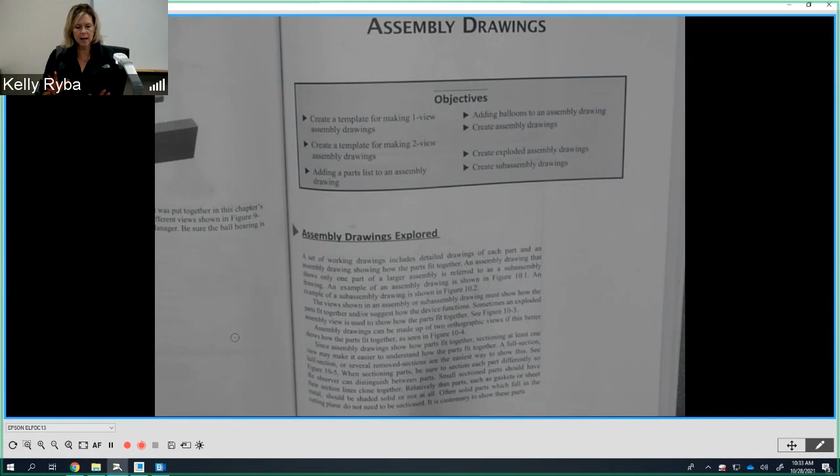So what I'm going to do is go underneath my document camera here. Chapter 10 starts on page 339. This is Chapter 10, Assembly Drawings. Now, the big thing that assembly drawings do in this chapter is set up the borders so that you can get a bill of material set and then get the parts ballooned. It also sets up a couple different types of assembly views so that when you pull your drawings in, they're all set already.

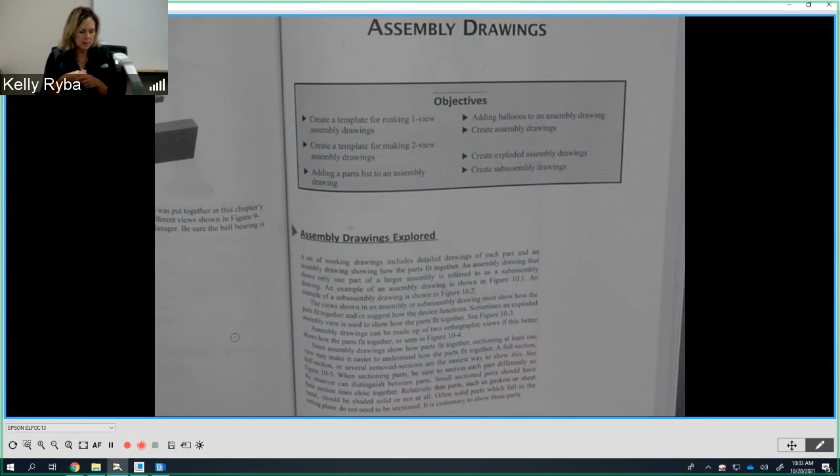So I want to go over what the process is here. First of all, what they're going to try to accomplish, what the process is. I'm going to do one of the tutorials here today and then let you go from there.

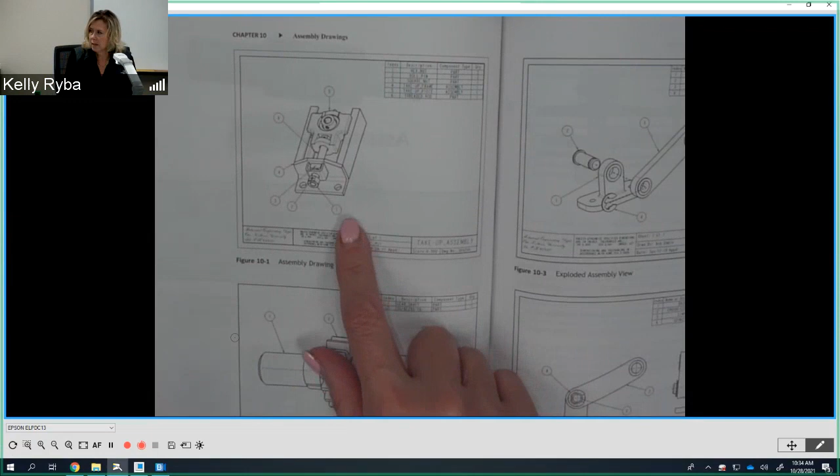As we turn the page here, you're going to notice there's a couple different views of different assemblies. The first one here, this is an assembly drawing—a 3D view of an assembly that is together, okay? A 3D view of an assembly that is together.

Then we have a subassembly, okay—part of a larger assembly, but kind of putting a couple of pieces together to start off with, which probably seems to make sense, or maybe pre-assembled, if you would, before it gets to its final. This is a subassembly drawing, so again, this is a 3D view with it together.

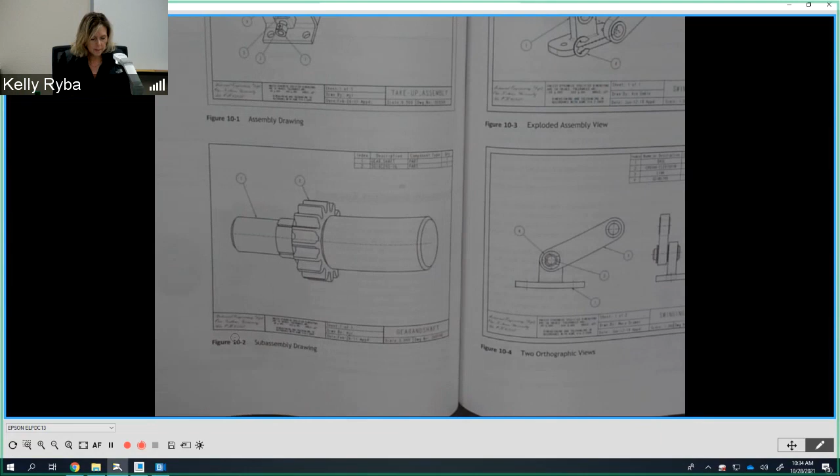Then we can also do exploded views. Now, exploded views, like I told you last time we were together when we talked about assemblies, are nice and all when we have parts manuals, okay? When we're sending things out to the shop floor or for engineering purposes...

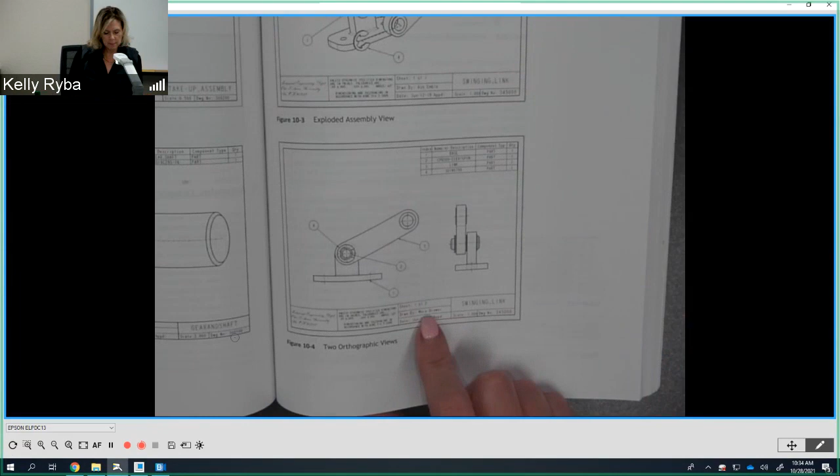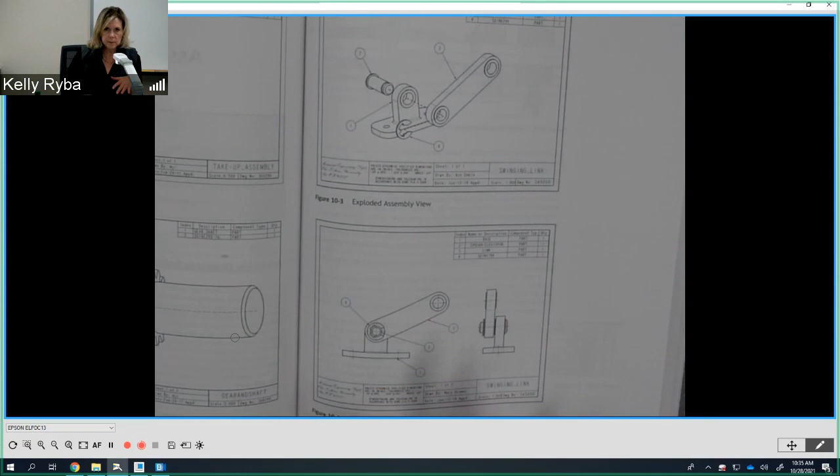We're either going to do the orthographically projected assembly that we see here, okay—that's the preferred one—or it's sometimes nice to show the parts together in the together form. The exploded views are really saved for things like parts manuals, where maybe a layperson or a customer might say, oh, I need to order that part, okay, or something like that. But for engineering purposes and shop floor purposes, we would do one of these two: the together 3D view or like a 2 or 3 view assembly drawing, okay?

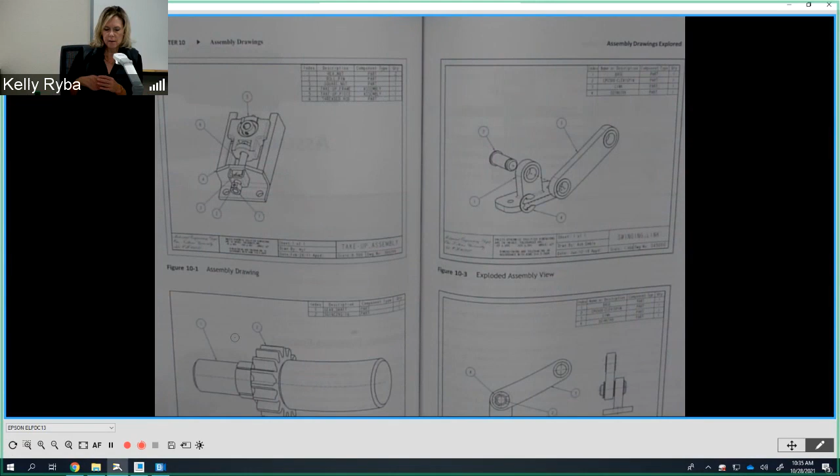Notice that all of them, no matter which one we're at, have a couple things in common. There's a bill of material. Now, based on the experience you guys have—if you're here in Creo, you've had a couple levels of CAD already. You did AutoCAD, you did SolidWorks, and now we're doing Creo.

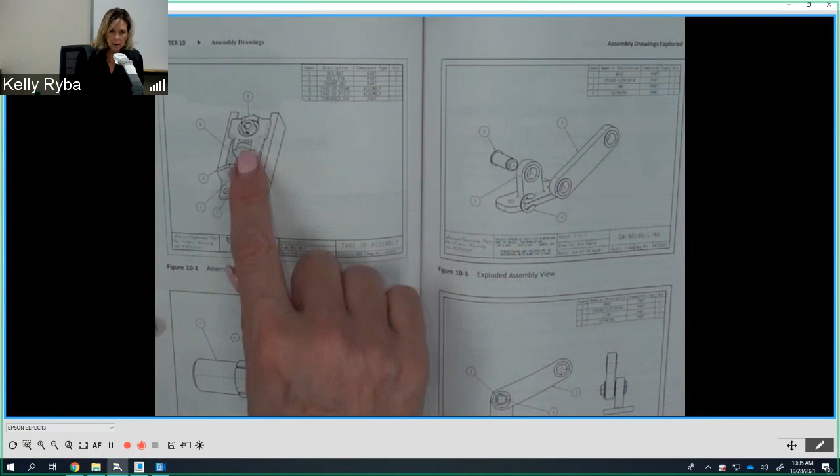So bills of material are something you're familiar with. Basically what they do is let us know balloon-wise which part is which, and give a description. In this case, they have a column for component type. Typically we would put part number in there, and this is going to be the quantity.

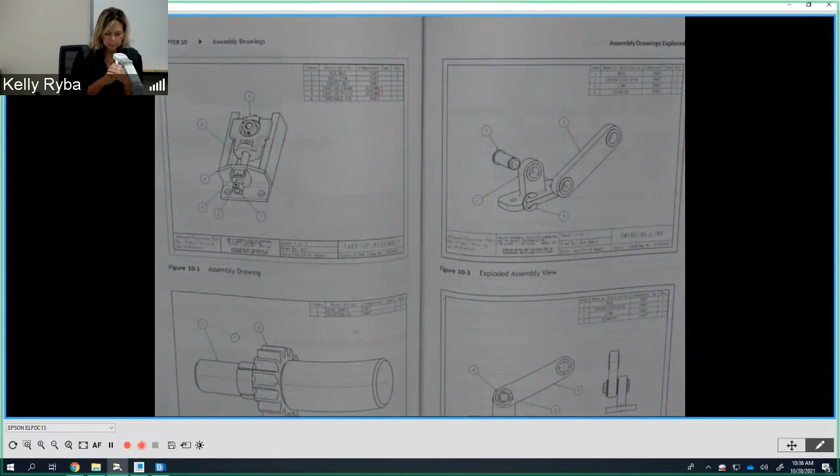Same thing you'll notice for the subassembly, just fewer parts, and then for the 2-view. The exploded view does the very same thing, but this isn't the type you would actually send to the shop floor. We can do 3D. 3D is nice, but let's keep them together, or the 2D, the 2-view.

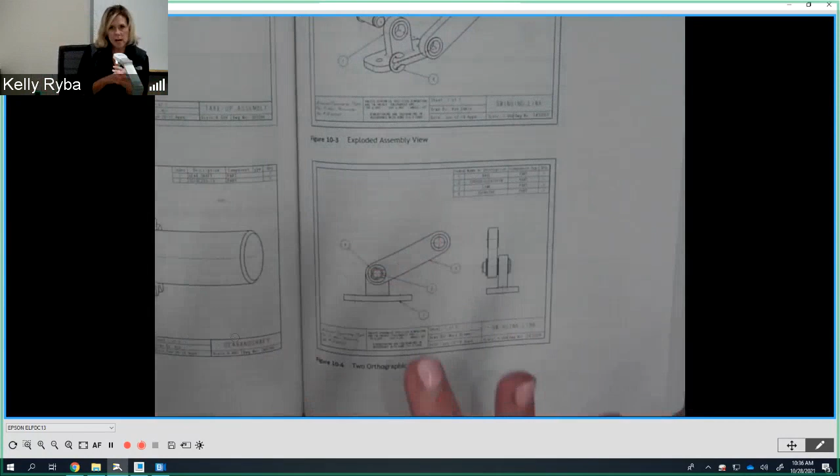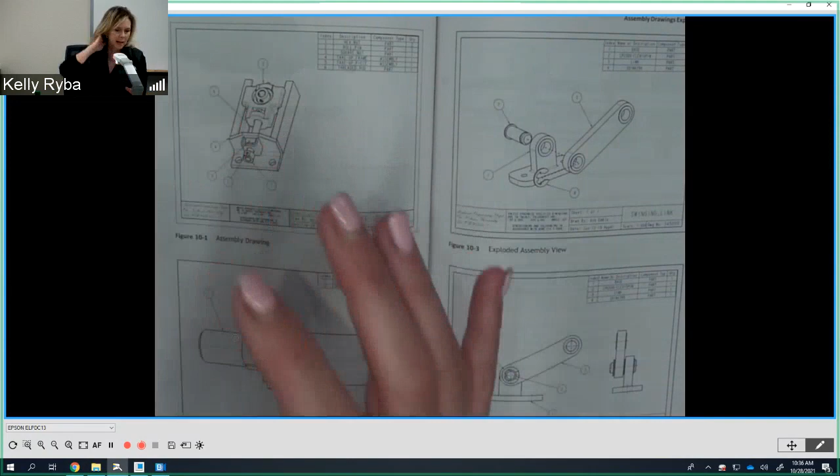So in this chapter, the main activity they're doing in the tutorials will set you up for the homework. You're going to be creating the drawing borders that set up your bill of materials so it automatically comes up, picks the appropriate views, and puts the balloons on. We're going to be creating an assembly template with the drawing border and all that stuff in place so it's all set for us. Those are the two things we're going to be doing.

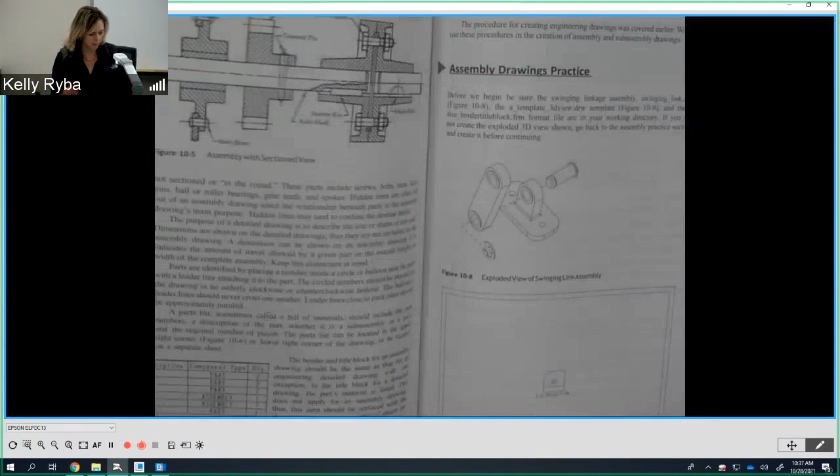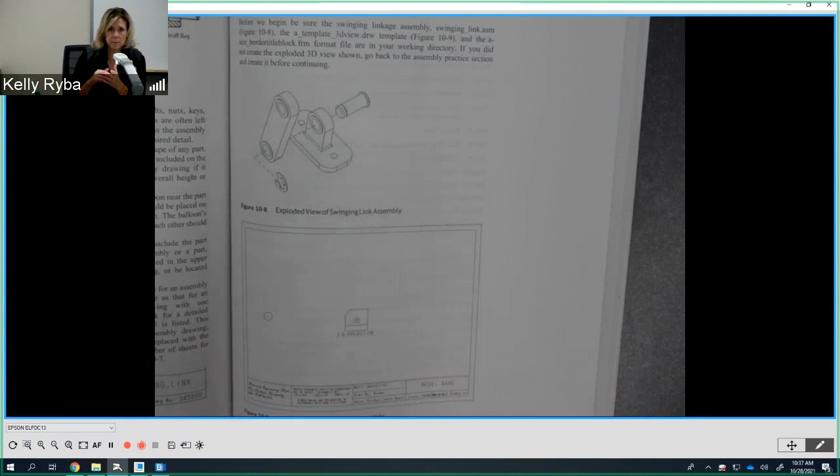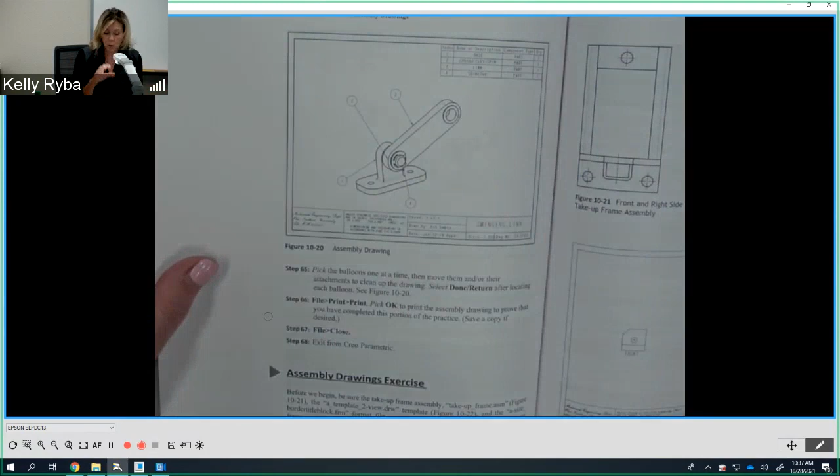So as we look here, I'm going to point here first, and then we'll go back and do it. The very first tutorial, which starts on page 343, is an assignment you have to go through because you have to create this type of drawing border. We're going to create a drawing border. I'm going to go to the end here, where you have the 3D view of the part when it's together, ballooned, and a bill of material up here. That's the process they walk through on pages 343 to 352.

So that's the first type of border you're going to create. Then the next type of border you're going to create starts on page 352 and goes to 364, and we're going to create a 2-view assembly together with the bill of material here. So those are the big two things.

Now, once we have those created, your problems are just pulling up some other assemblies and using those borders to create the drawings, and cleaning them up so they're nice assembly drawings. So the tutorials are essential here — they're actually worth more than the drawings I'm having you assign.

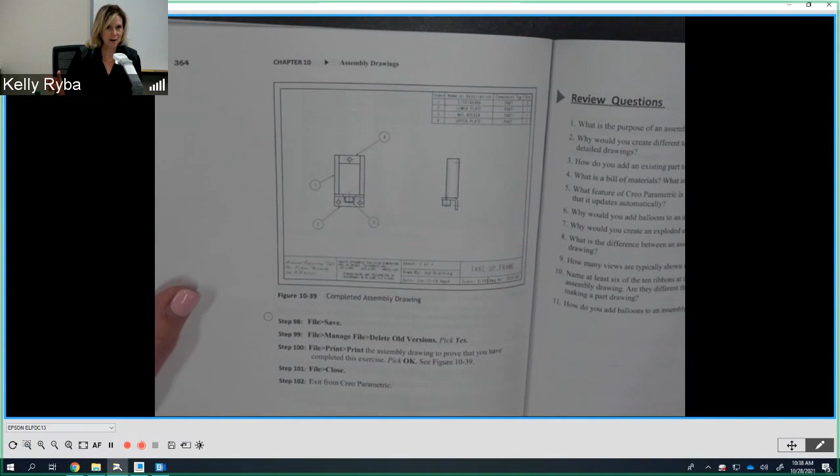Let's look at our homework quick. The tutorials are going to be required that you do. If we go into Learning Plan, Chapter 10, down to Chapter 10 homework. The Chapter 10 tutorials, there's two of them. They're actually worth 10 points each because you do have to go through some work here, creating those template borders for the 3D view and the 2-view assembly drawings.

And then you're going to use those in the problems down here. So it looks like there's a lot of homework problems, but you already have these assemblies created. All you're going to do is put them on the appropriate border using the tutorial borders you created, and these down here end up being just 5 points each.

There's still 40 points total because there's 8 to do, but you're going to do the adjustable shaft support with either the 3D assembly and the 2-view assembly. Then the same thing for the step shaft subassembly, the take-up piece, and the take-up assembly. So you're doing 2 assembly drawings for 3 different assemblies you've already created. We're going to continue to build on what we've done.

So what I'm going to do first here is today's tutorial, creating the 3D view of the, what is it called, the swinging link. So please open up to page 343, and that's where this tutorial starts. Now again, this is a required tutorial for you to do that's going to be graded.

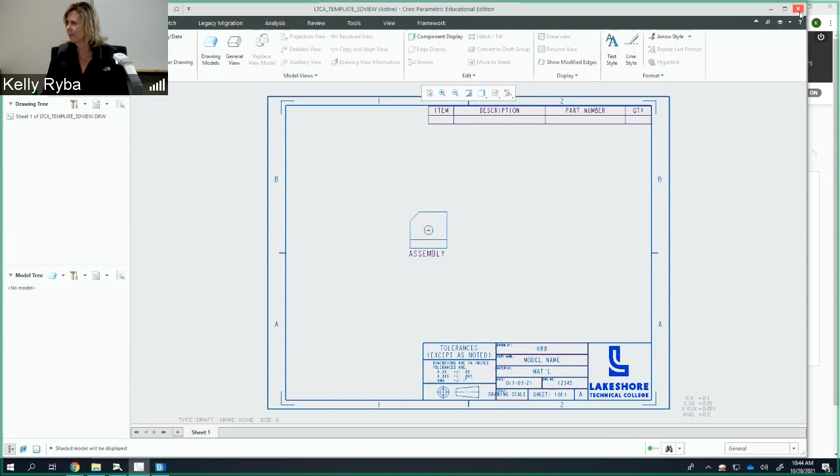Now what I'm going to do here - oops, what? I think I saved over the top of mine. Okay, let me do this, hold on. I think I got to download mine. I might have actually saved over the top of what I wasn't supposed to. So let me get rid of this.

I'm going to close this, and I'm going to go to session - I'm going to erase all this, deleted. Shoots. Okay, let me download this guy.

And I'm going to change it over. I'm going to put it into my downloads, to my drive, and my working directory. Oops. There should be the good one - my downloads.

I want to replace it. I was working with these last night, I was tired, I might have accidentally deleted over the top of something I wasn't supposed to. So let me go back in here and open up the replaced one now - LTCA 3D view. Shoot, I must have uploaded the wrong one.

All right, now - actually, it's totally fine. It's totally fine. We're just going to use this and we'll go through the process anyway. It should be totally good.

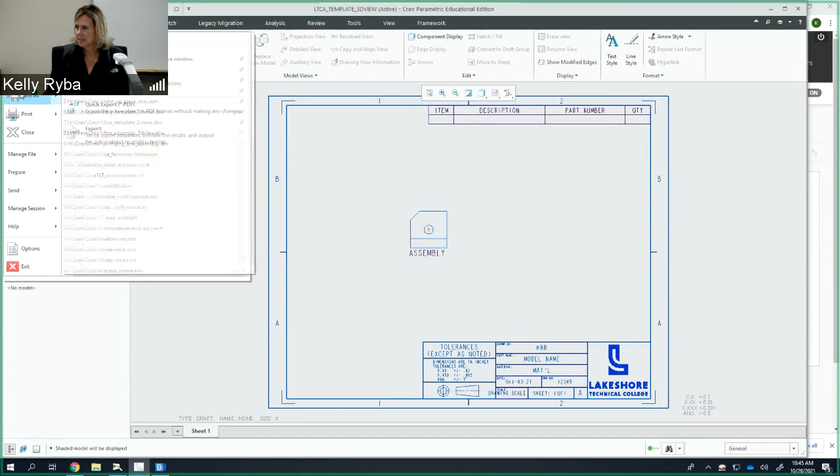So what I'm going to do here is exactly what they say. We're going to do file, save as, and save a copy. What you want to do is LTC A underscore template underscore assembly - oopsie - underscore, I'm going to do ASSY underscore 3D view, so you know this is going to be the 3D view assembly. I'm going to hit OK on that.

And then we're literally going to do this step by step. I'm going to do file and close this out, and I need to do the same thing again - file, manage session, erase what's not displayed, and hit OK. Now I'm going to reopen the file I just saved. I'm going to do open, go back over, and it's the one, the ASSY assembly template assembly, ASSY, and there we go.

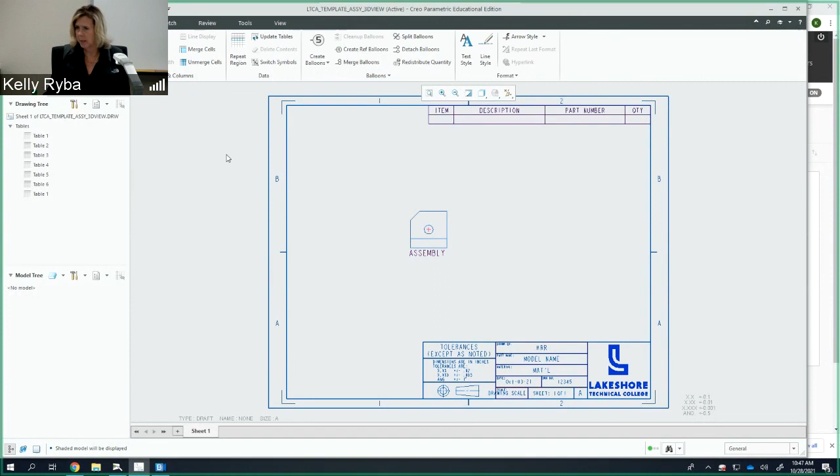Now what I'm going to do is go up to tools and create a template, selecting the table tool. It's telling me to double click on the material box in the title block, but I did not change anything there. I kept everything the same as my LTC title block, so I skipped over that. You don't need to do that either.

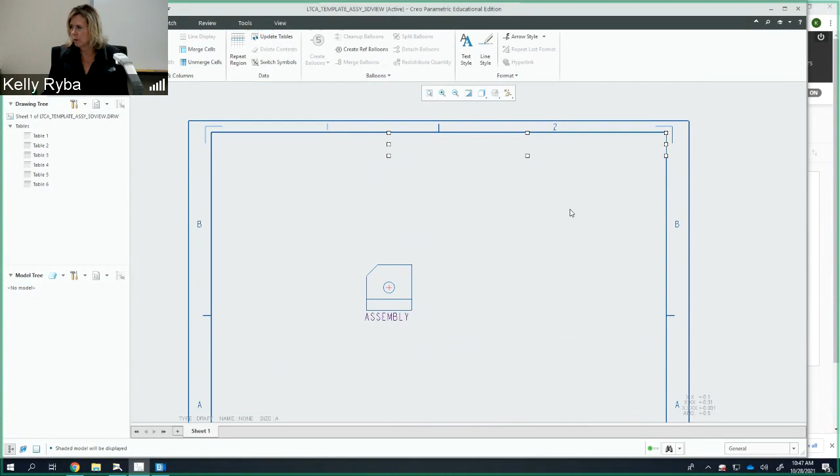Before we get into the other part, we are going to select and delete that bill of material up there. We're just going to re-put it in so that you have it. And then we are also going to delete this view as well, so that we have a fresh piece of paper.

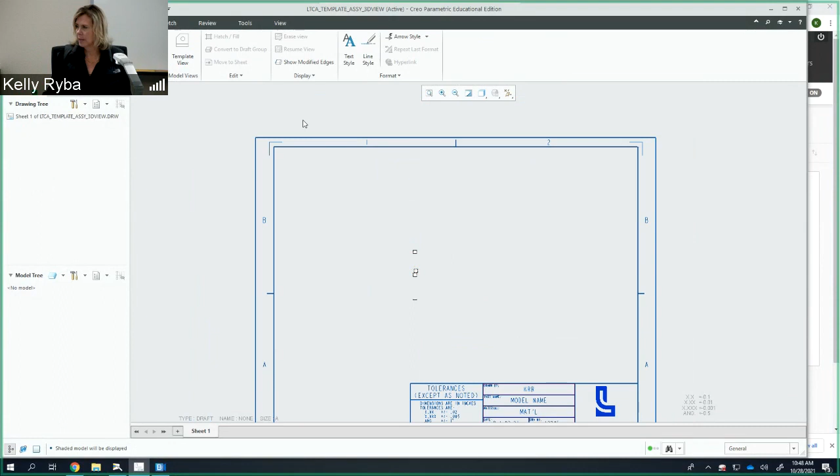Now we're going to go up and select the layout view here, and select template view. This is where we need to call our new name assembly. Then over here for view status, we are going to have orientation not to the front, we need it to be the 3D view. Make sure you put it in just like this and remember exactly how you call it, because we're going to have to make sure there is a view like that in our assembly drawing.

Now you can put the exploded view in here too, if you wanted to put the exploded view in as default, capital D, that way you do have an option for an exploded view if you wanted. It's not bad to have it, you can just check and uncheck it. We'll see where you can do that. Then we're going to go down to model display, and we want no hidden lines. Then down to tangent edge display, and we want dimmed.

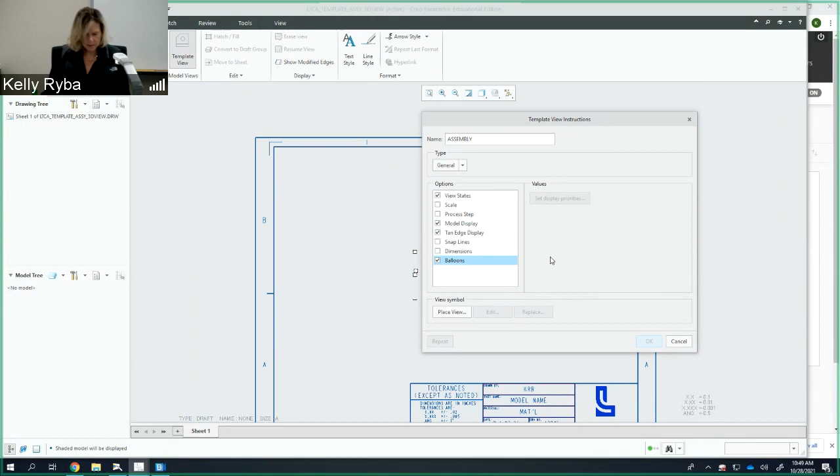Now we also want to check balloons, make sure it's checked. And then we're going to place our view. Why isn't it letting me place my view? Okay, I think I just have to click. There it goes.

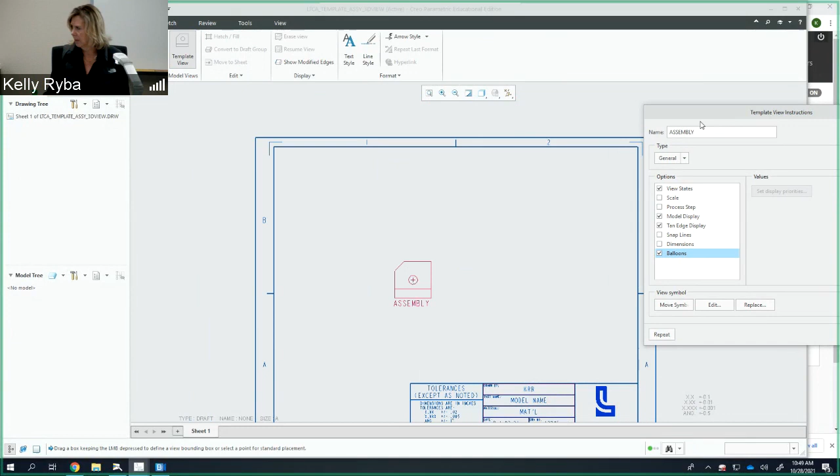Once that's done, when you place your view here, because we're going to have a bill of material up here, it's good to go a little bit to the left, kind of in the middle-ish, but a little bit to the left. And then we're going to hit OK. All right, so we're all set there.

Now it's a good idea to just hit save here, automatically save, and then we're going to turn the page. We're going to start making our bill of material. I'm going to zoom into the upper right-hand corner here, and we're going to go over to table, and we're going to create a table. So we're going to click on this.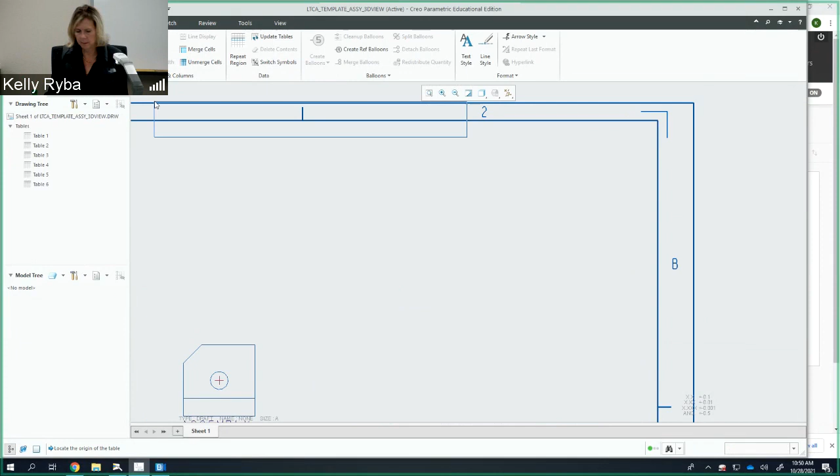Now we're going to have 1, 2, 3, 4 across and 2 down, so we're going to click on that. Then we're going to go in here and place it. Now we want it to be right in the upper right-hand corner, like in that corner, so that there's not a gap. So place it so it's right on that upper line and the right line, and then zoom in to make sure it's where it's supposed to be. See, mine's not all the way there.

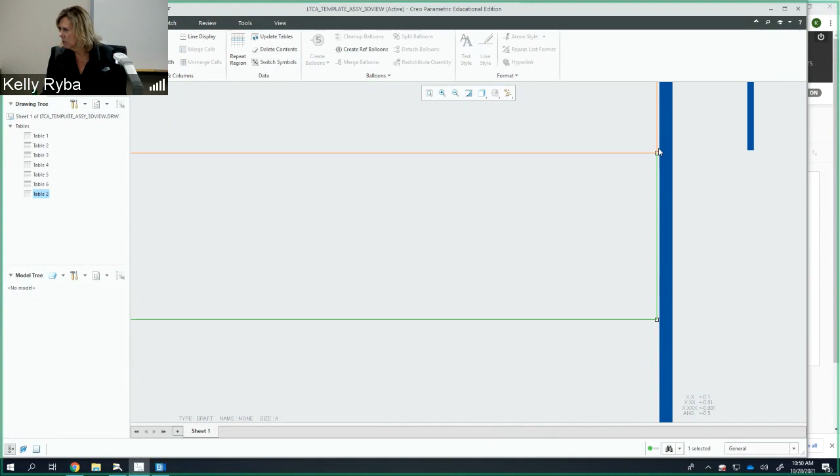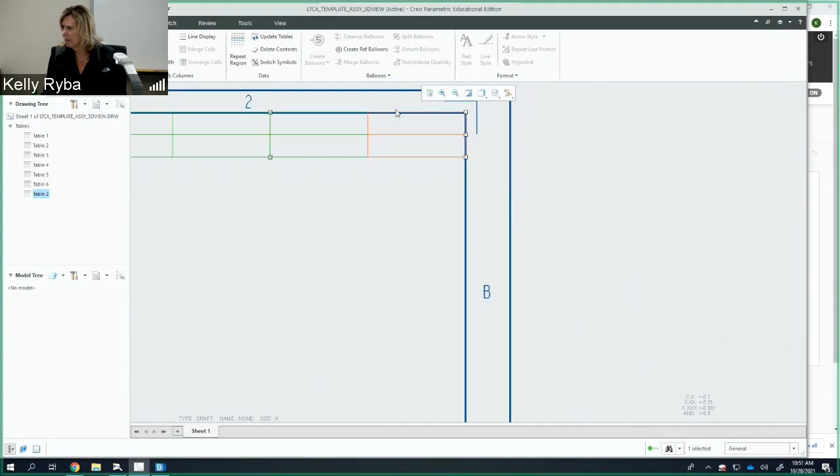So I'm going to grab it again as a whole by selecting it and then moving it over, when it's there, onto the actual border. Do you see how I did that? And I'm going to check this part up here. This part looks good. Okay, so just make sure that it's scooched up there so that there's not a gap.

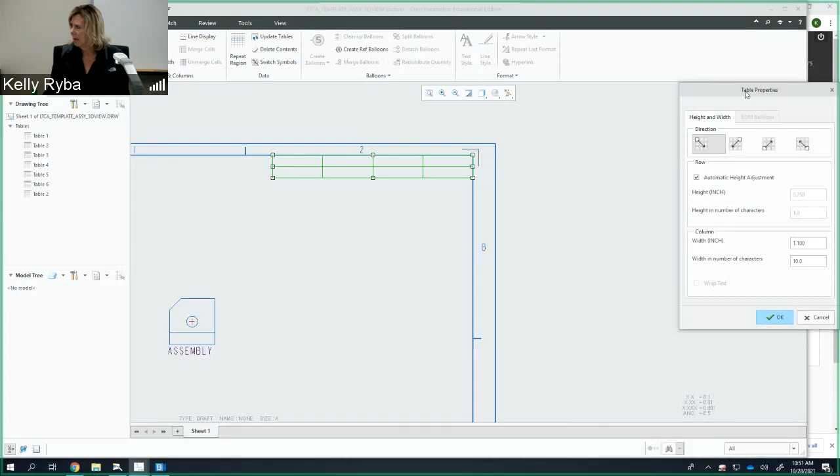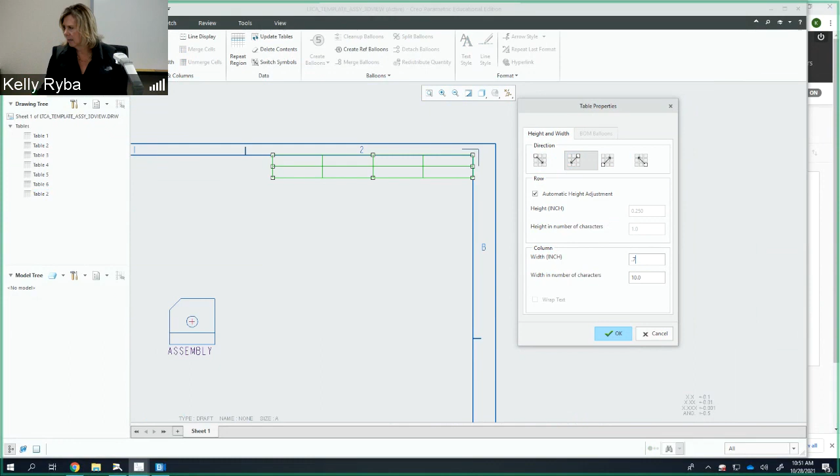All right, so now what I'm going to do is pick this table over here, and I believe it's table 2. When I click on it, notice that it highlights it. So table number 2 I pick, and I'm going to go to properties, which is like that edit definition symbol. Now I come up with this. I want to do my direction in the second box over here, leftward and descending. And then before I leave here, I want to set my column width - now they have 0.5, I'm going to put 0.7. I found that I just like it a little bit wider than the 0.5 that they have, so I'm going to put 0.7.

This is going to set up the column width for a couple of those. Now my first column is set, so I'm going to go to the second column and click on that.

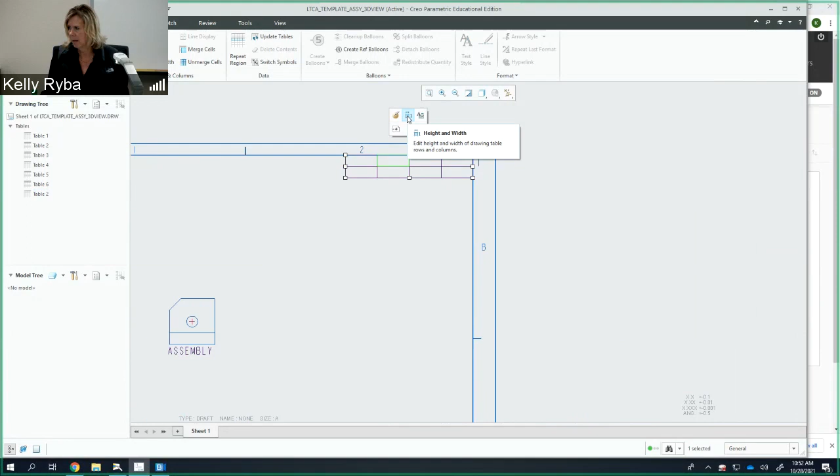Just to the right of that, in properties or edit definition, there's a height and width for this second column. I'm going to go down to the column width.

They suggest 2 inches, but I'm going to put 2.5 for a little wider column. Then I'll do the same thing on the third column: click there and change the width. Here they suggest 1.4, but I'm going to say 2 inches.

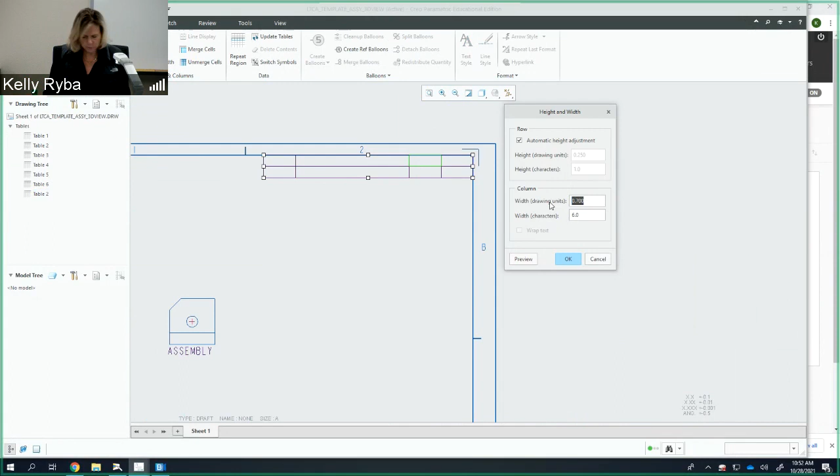The last column is going to remain the same. Then it says to zoom in to check where things are, making sure everything is in the corner and not offset from it. It all looks good.

The next thing we're going to do is put headings on our columns. They use a little bit different names for things. We're going to call the first one ITEM, which is your balloon designation, so we'll call it item and not index. Make sure this is in all caps.

They don't do it in all caps, which kind of bugs me. The next one is Description - D-E-S-C-R-I-P-T-I-O-N, make sure you spell it right. Then just click a different cell to get out of it.

Then double click on the third one to activate it, like I am, and I'm going to put Part Number, because that's what we should be looking for, and we'll adjust that as we go.

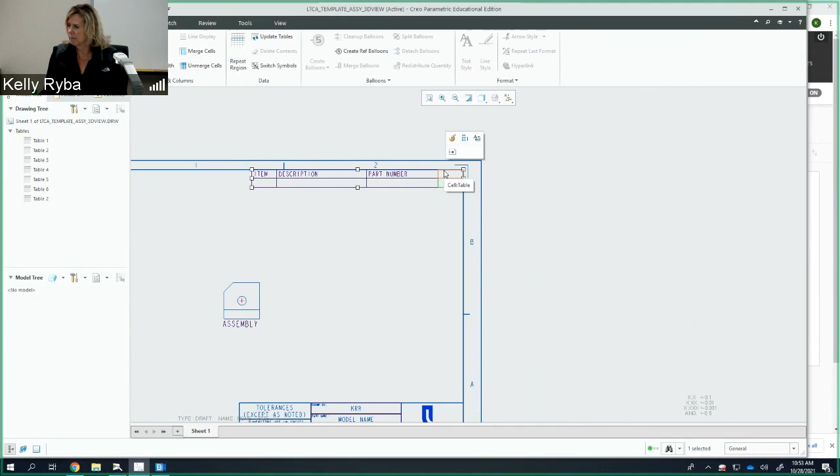Right now we haven't set ourselves up with a part number, but it's good to put it in there so that for future ones we make sure to add it in. And then the last column is going to be Quantity, Q-T-Y.

Then you can just hit enter - oopsie, not enter. Now it wants you to not hit enter here, and instead do a save: File, Save. Okay, File, Save.

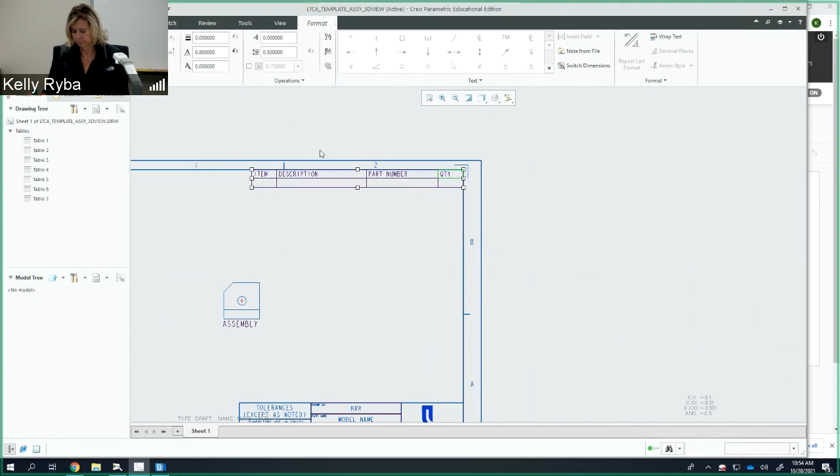Now the next section here is really important, so it's one of those things you've got to do step by step. If there's any place you're going to pay really close attention to, starting on step number 33, this is the part. So now I'm going to escape out of here.

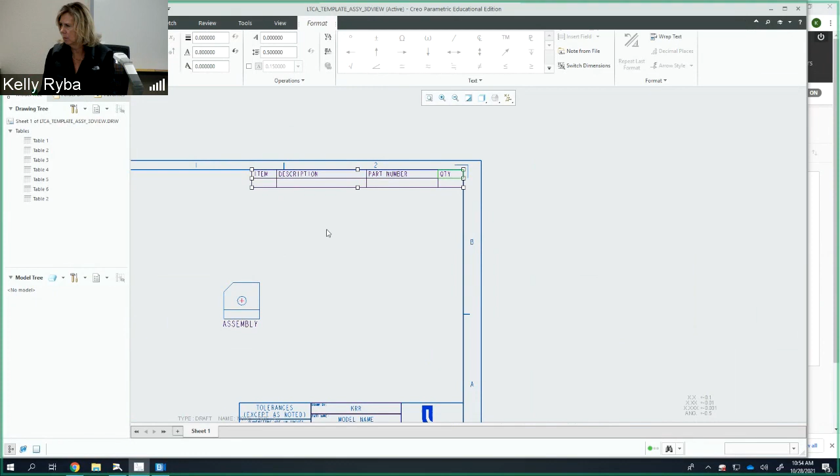I don't know why that's selected like that.

So I'm going to go back to the table, and we're going to hit Repeat Region, okay? Repeat Region, and this menu manager comes up. We're going to hit Add, and make sure that Simple is selected down here.

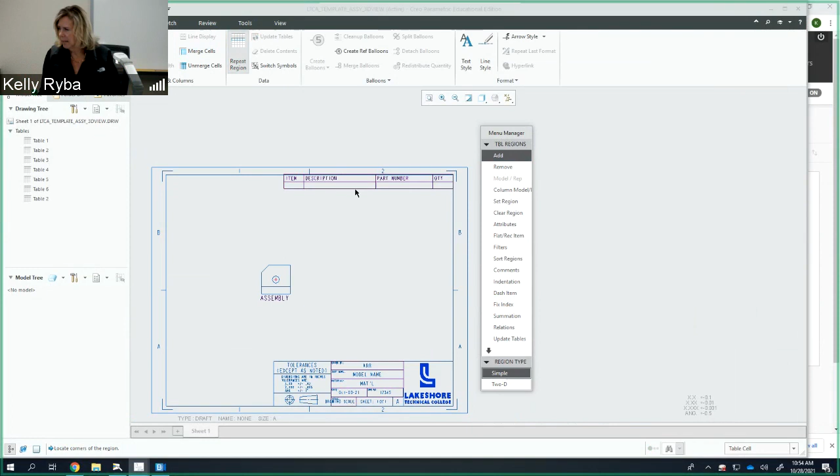Now this is where you have to be really careful. I'm going to zoom in here a little bit. I am going to click the item, second row of the item, then go over and click on the quantity, second row.

Now it doesn't look like anything happened, so don't click again - it tells you not to do that. We're going to arrow down, hit arrow down here, and then hit Done. We'll see if this worked out okay, because I had to do it a couple times. If it doesn't, just try to redo it again.

So now I'm going to double click on the item and this report symbol comes up. I'm going to put in RPT, and then INDEX, and that's going to pull from the balloon. Don't worry about the overlap here, it's totally fine.

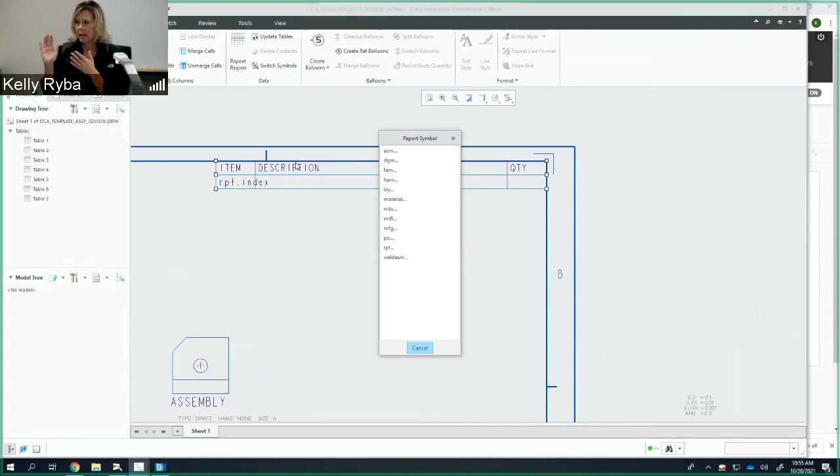Now I'm going to double click inside here, and this is when I know it works good, because if you didn't do it right, it's going to actually want to put text in there. If you get this report symbol, then you're all set.

So now in this one, I'm going to put ASM, and it's going to be MBR, and then this is going to be Name.

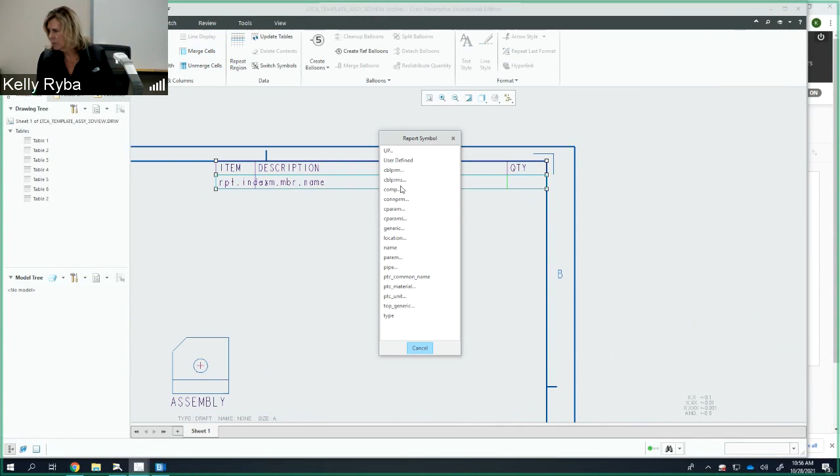Then we're going to go underneath Part Number. We're going to click that - it's going to be Assembly, MBR, and then this one is going to be Common Name. Now it isn't going to be set up quite right with a number, but going forward we're going to plan for that when we create assemblies.

And then Quantity - we're going to double click on that: RPT, QTY, and then you're done. And that's it.

What was that? It should be down towards the bottom. Oh, PTC, yep, PTC, common name. Yep, that's the last one. It's going to be the RPT and then quantity, QTY. Okay, so that's all set.

Now we're going to select this box by drawing the imaginary box around it. So you're just going to left click and drag around, okay? And now what we're going to do is we're going to click on this, okay?

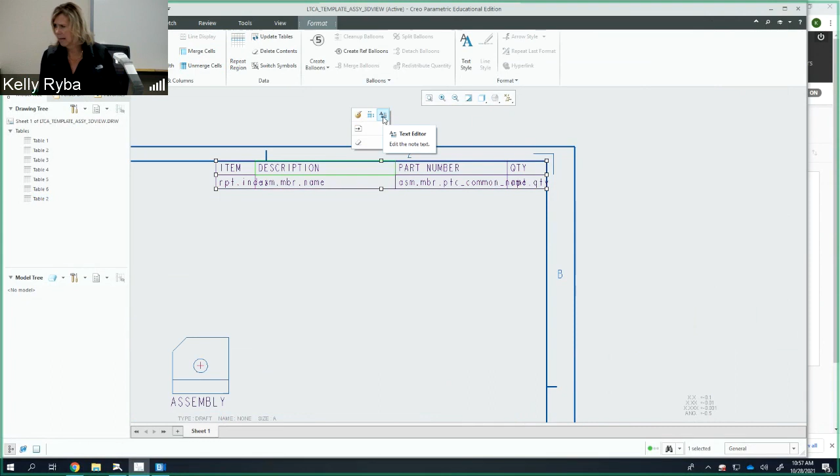And then what's going to come up is this box, and we are going to do the text editor box, which is to the right of that column and row business. Maybe this wasn't it. Cancel. Let me cancel out of here. Are you sure you want to cancel? Yes.

Also, draw an imaginary box around the entire thing, then press and hold. Oh, I did the left mouse button. It should be the right mouse button. So let me click right here. Now I'm going to do right mouse button. There it is.

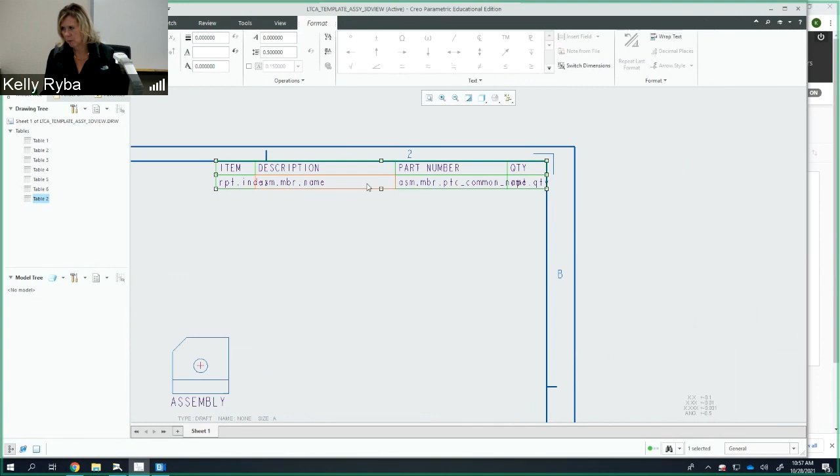And I want to do the text style right here. Text style. And then I'm going to get this guy. Okay, so right mouse button and then do the text style.

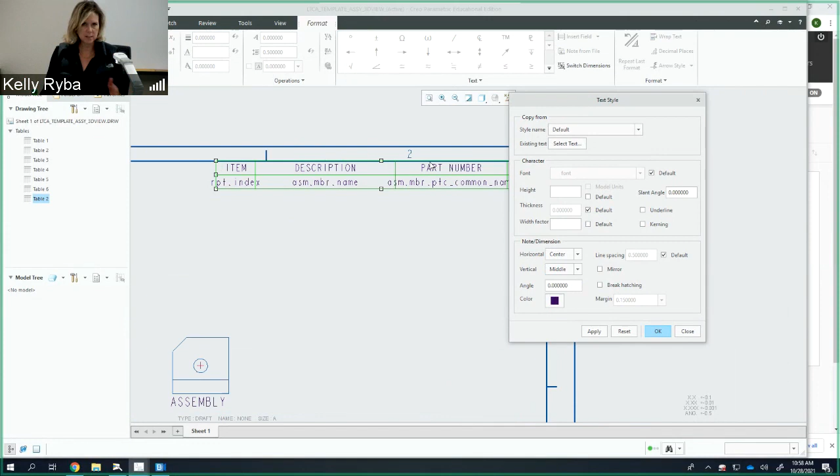Then here underneath the note dimensions, horizontal, we want these to be center, and then on the vertical, we want it to be middle. So when I hit apply, notice that it justified to the center and it centered them top to bottom here. So I'm going to hit OK, right?

For some reason, some of my commands are two rows. Oh, I don't know. I don't know if that makes it. I'm not sure, I'll have to look afterwards.

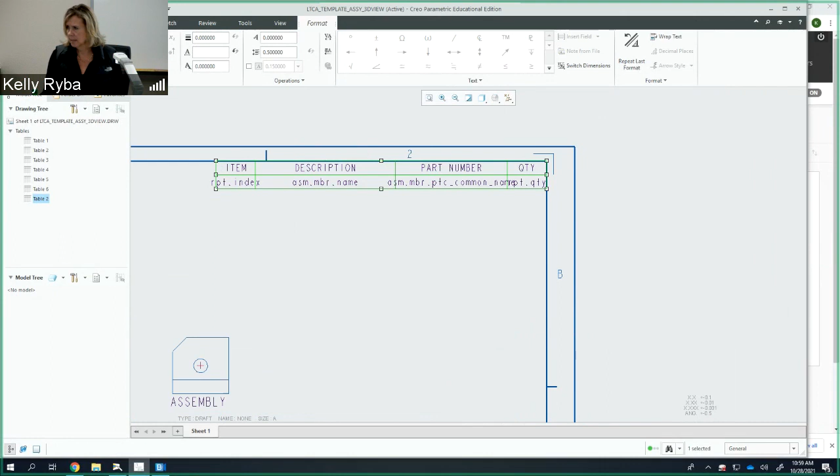Okay, so then with the repeat region still selected, if we go back to select repeat from the table, okay, then we're going to do this guy again. Now what we're going to do is we're going to select attributes. Use the left mouse button to pick the second row of the table, okay?

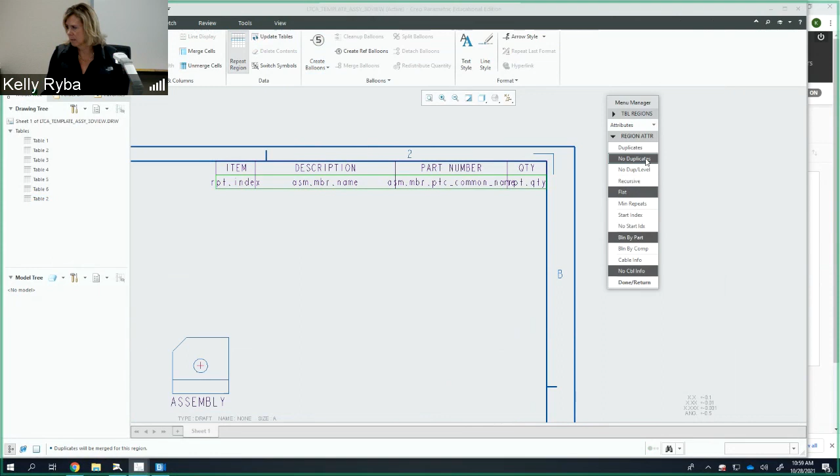So pick the second row, and then we need to say no duplicates, no duplicates. And then we're going to select done and return. And then we're going to scroll down and pick done, that down arrow, and then pick done, okay?

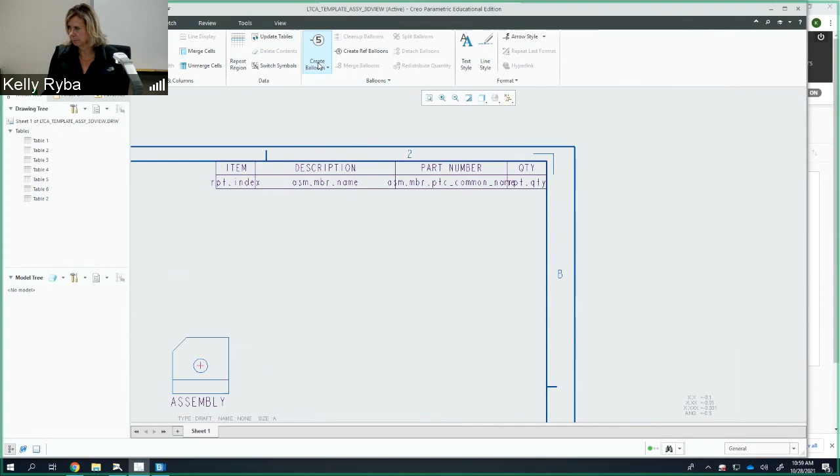Now while we're still in here, we want to select or create balloons here, create balloons, and then create balloons all, okay? And that's it. Now we're going to do a file, save. Okay, file save. And now it should be all set up.

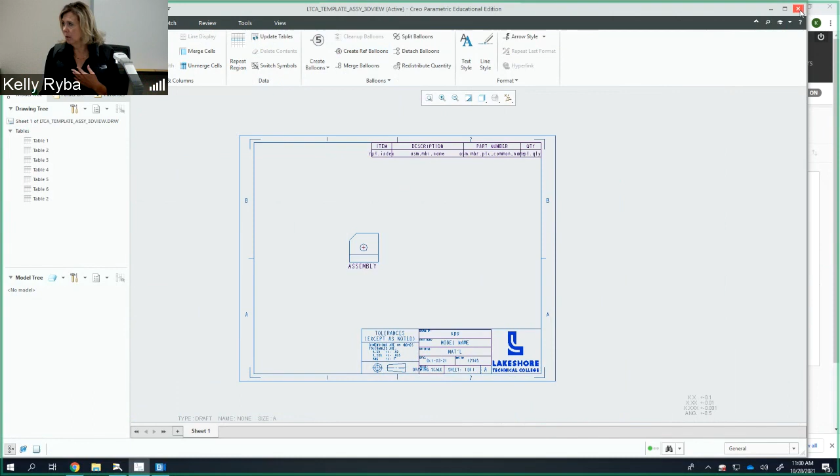Now we'll find out if it is, because that's what we're going to do with our swinging link. We're going to find out if we did it okay. So what we're going to do now is I'm going to do file, close. But then I need to also do file, manage session, and erase not displayed, so we get rid of that, so we've got a clean slate, like we would have without going out.

Okay, now just verify that your working directory is still set. Mine is. Okay, and what I'm going to do now is we are going to create a drawing, an assembly drawing. So we're going to start new, go to drawing. And now you're going to call it whatever you want to.

So for instance, for the file name, we're going to call it swinging underscore link. We do have to put the underscore in there. And then the common name, now this is where that would be in the part number column. So I'm going to put 1, 2, 3, 4, 5, just to put a number in there. And I'm going to hit OK.

Now, default model, this is going to be the model that we're going to pull from. So this is going to be the swinging link assembly. So we're going to go browse, and this should be in your working directory. So I'm going to do swinging link, I think it's my first one. Swinging link, and then we're going to hit open. Okay, so that's going to stay up there.

Then we're going to say use template, so we're going to browse and pick the template that we just created. Okay, because we want to test it, we want to see if it's going to work. So this is the template assembly 3D, and then open. Okay, and once we have that, we can hit OK.

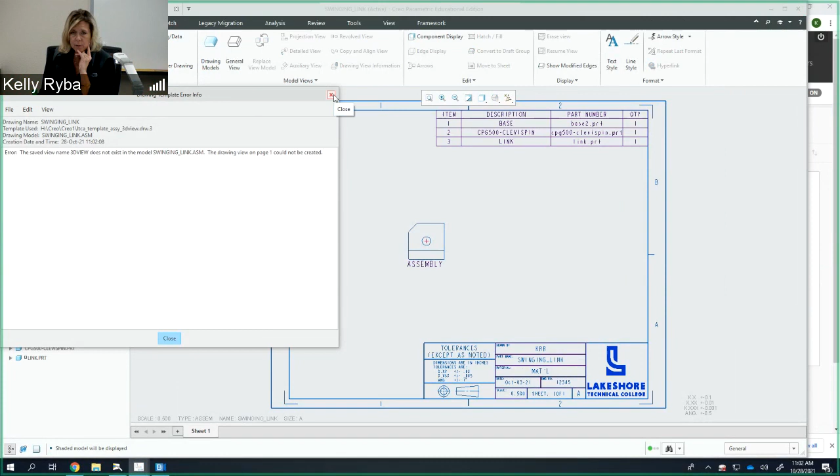So what we need to do is go back to the assembly and save a 3D view of the drawing so that we can import it here. We're just going to file, close, so we'll have to start over with this, so don't worry about that. Then file, manage session, and erase not displayed.

We cleaned everything up again, so we're going to go in and open that swinging link assembly. Open, swinging link assembly. All right, so here it is.

So what they're looking for is, if I go up here to the standard orientations, the default orientations, this is what it's looking for. It's looking for a view called 3D view. My assembly drawing is looking for a view that's called 3D view, and there's not one there. If there was, you know, when we set up the borders before, it looked for a front view, right view, or top view, and they were here. But there's not a 3D view here, so we need to save one.

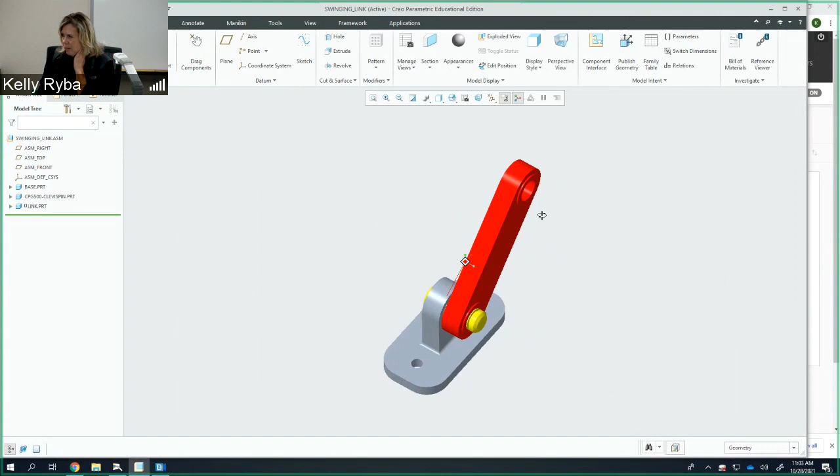So what we want to do is, before we save it, get it into an orientation where I can kind of see everything. So I'm going to put it like this-ish, something that looks like you can get the balloons in place and it's going to make sense, something like that. I guess that's not super important at this point because we're just going to use it as an example in the tutorial.

But then I'm going to go right next to this and go to View Manager, click on that. And what I want to do is go to Orient. Yep, Orient, that's the orientation.

So these are all the standard ones that are in there, and I want to add a new one. So I'm going to click on New. Notice now I have the opportunity to do 3D, and do it all in caps like we did in the assembly drawing, so it's looking for the appropriate title. Then I'm just going to hit Enter, and now it's in there.

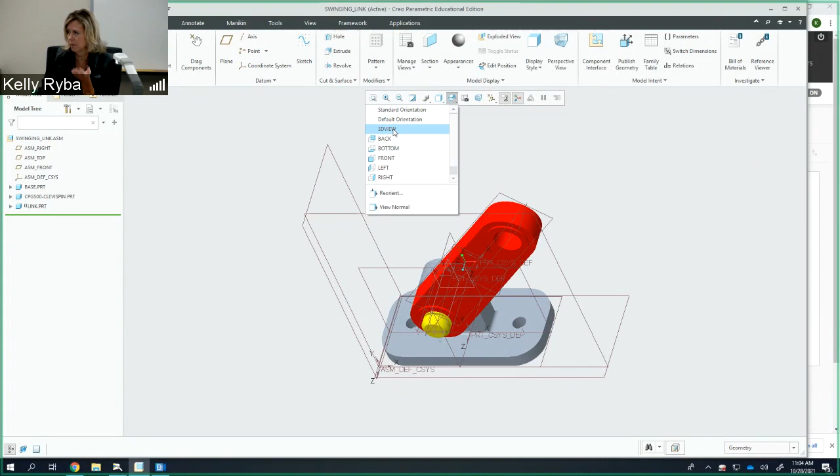So now if I hit Close here, and let's say I go back to my orientations, I'll go to standard orientation, but then switch back, and you'll notice that now I have that 3D view in there, and now it's there for me.

So now that is saved in there, we have to save our file. Go ahead and save your swinging link assembly so that it remembers that it's there.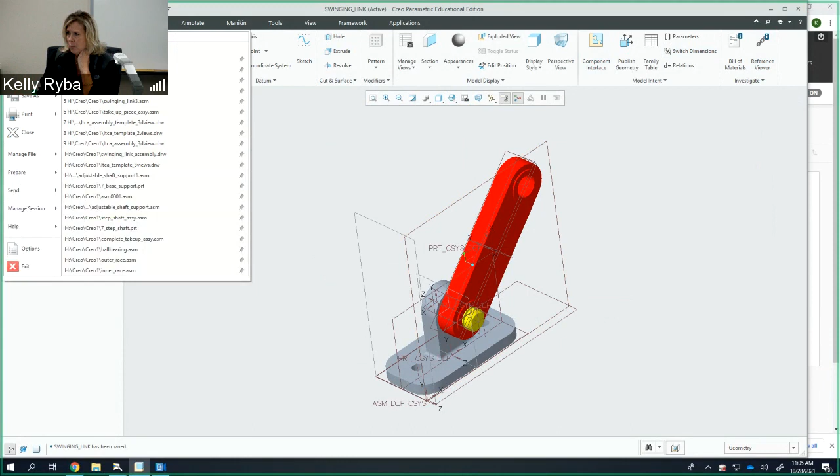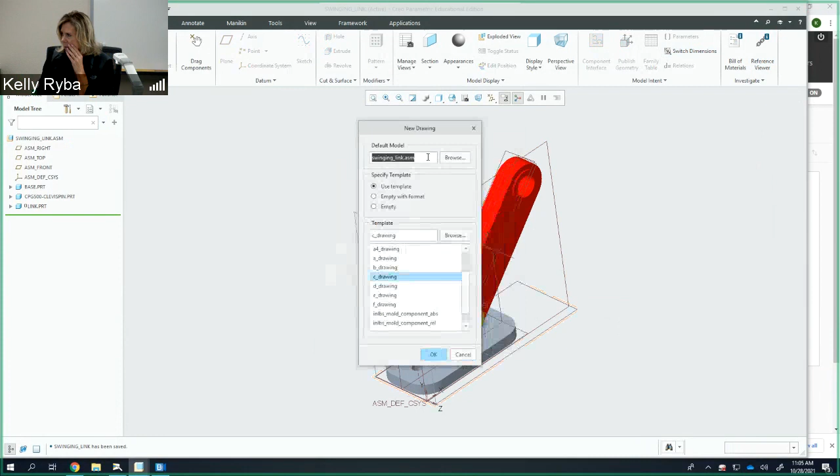Now I don't think I need to close this. I can just do File, and start a new drawing, and I'm going to call it my swinging link. And then common name, 1-2-3-4-5 is fine. Then OK, and it has that already in there. Now my template is going to be my LTCA assembly template 3D view. I'm going to hit open and hit OK. And now it's there, see that?

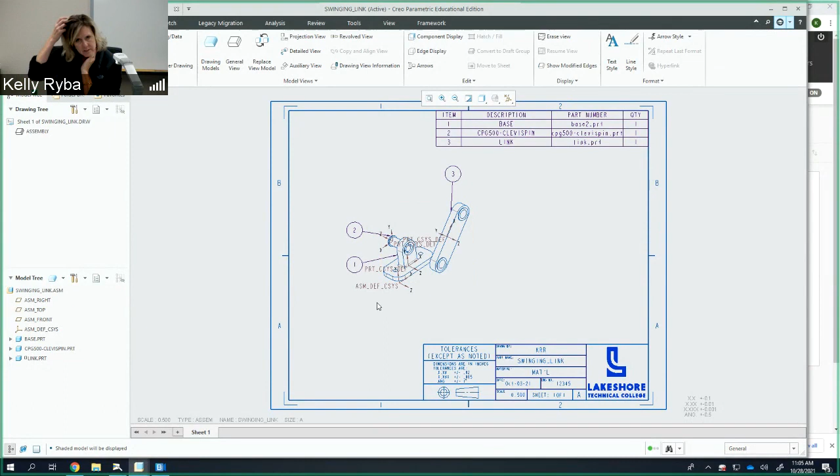Now, it did do an exploded view for me because the exploded is in there, I had saved an exploded view. If you did an exploded view for that one and it wasn't required for the tutorial when we did it, you'll probably have this happen, but I'll show you how you can change that. If yours is together, then you probably don't have a saved exploded view. So did yours come in now? Yeah, okay, cool. So that's the deal. You have to have that 3D view saved, and you want to make it so that it's going to make sense with being able to see as many balloons as possible.

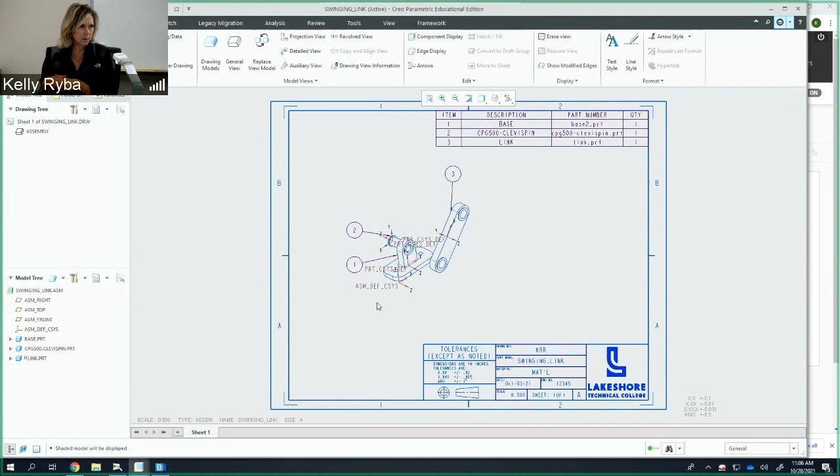Okay, so that's that. Now, how do we get this together? Did yours come in exploded, Josh? Yours didn't, okay, because you didn't do an exploded view, right? No, you did it, you just didn't save it. Yep, that's no problem, so to do that, let me see, I gotta remember where this is.

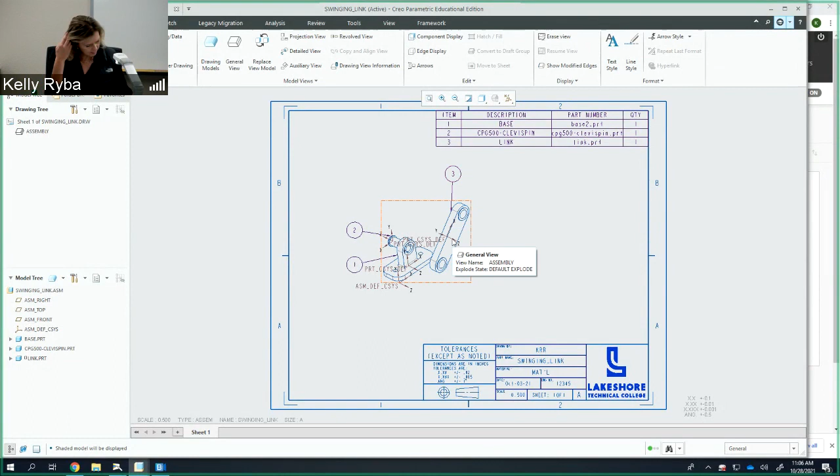It's kind of a pain in the butt to do exploded views, first of all. And second of all, like I said, they're not the ones that you necessarily want for sending out to the shop floor and manufacturing. These kind, when they're together, and/or the orthographically projected ones, are the common ones.

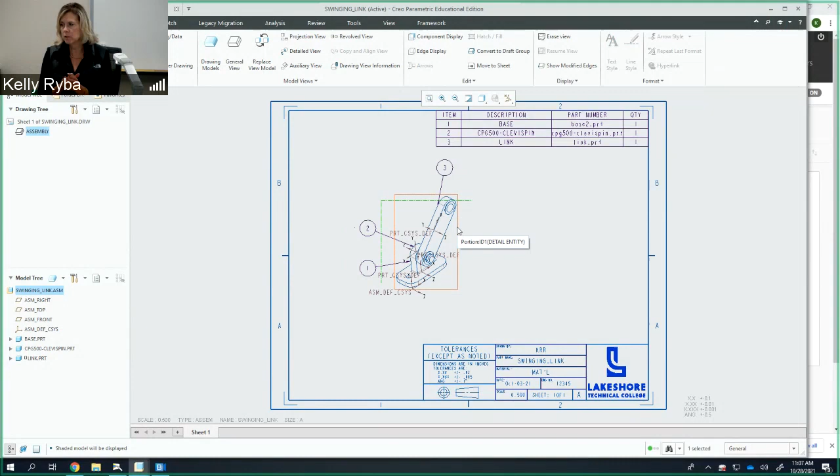Okay, so now what we would do here is we would clean this up. You'll notice that there are a bunch of different planes and things called out, so all I'm going to do is go onto each one of these.

If I click on it, isn't it giving me the option? Oh, maybe it's in here—the option to turn those on and off.

You turn them all on and off in that little ribbon above, over your drawing where it has the zoom to fit and all that stuff. You go to the axis, and you can hit select all. Are you serious? I've been doing them separately.

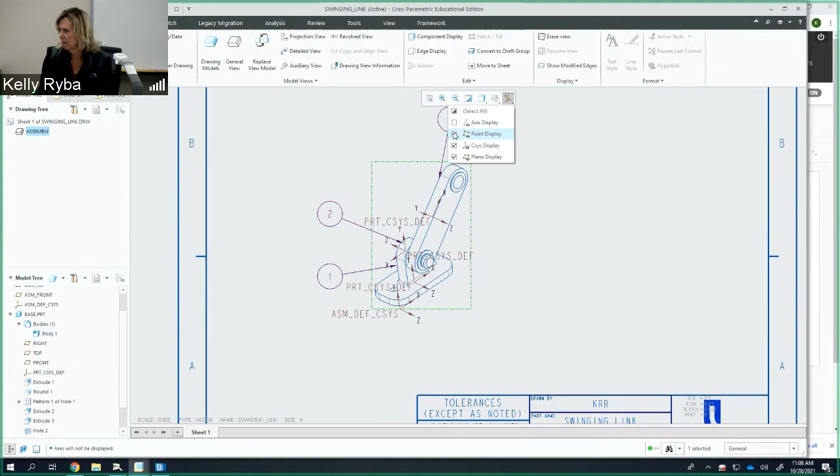Oh, select all, or you can turn them all off, huh? Yeah, that's the shortcut. I was doing them in the model tree all the time. I did that for a while, I thought there's got to be a better way. Oh my gosh, so if you didn't hear that, Josh just gave us a tip.

Over here, we can actually turn them all off right there. Oh my gosh, that's so much easier. So look at that—now we're done, right?

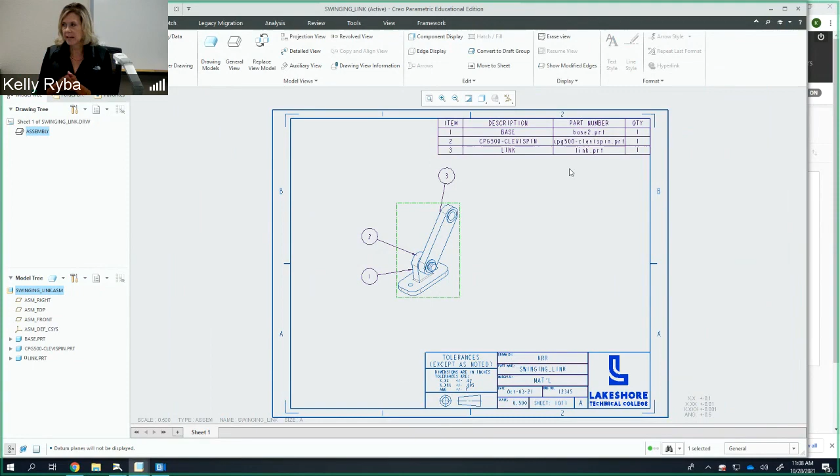Now you'll notice, because when we did our parts, our individual parts in the common name area, we did not put our part number in there. So going forward, let's be a little bit more cognizant of that, because down here in the title block, the common name goes to the drawing number.

So what I did was my part name was my name at the top, but then my common name is going to be our drawing number. And that's what I have in the bill of material as well.

So going forward with our parts, our common name, we're going to assign a part number to it. And the regular name is going to be what we actually put in the title block there. Okay.

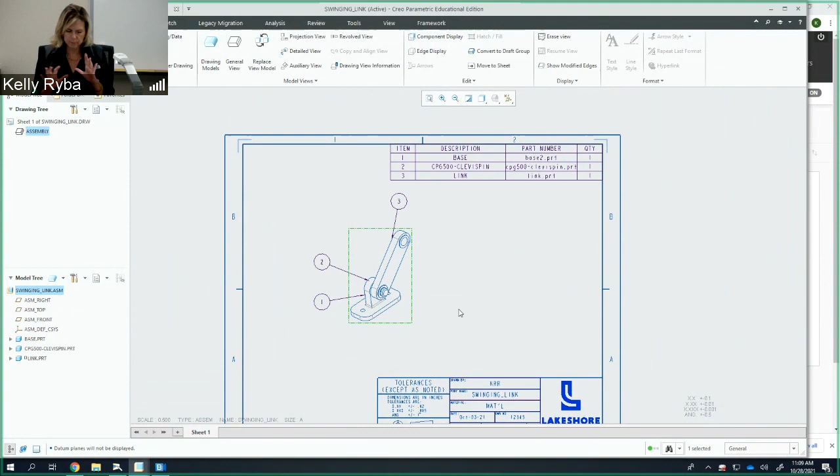I still want, even though they're not part numbers for the part numbers there, just leave them there because we haven't been practicing that. But going forward, we're going to be more aware of that based on how the bill of material is set up.

Okay, so basically what you would do here then is you would do your screenshot showing me everything here so that I can see that everything worked out.

Now, if something doesn't populate properly, or if it didn't come in, then something wasn't set up right when you actually did the assembly template for the drawing.

And if that's the case, just go back and do it again. That's all, okay?

Now, I encourage you to start with the LTC borders, because then they're official, and I think it looks better. And we had the old symbol, but now we have the new symbol, so we can kind of update that.

But it's your choice. If you like the ones that you created for yourself when you did the original ones a couple chapters ago, feel free to do that too. I'm not going to say you can't.

Okay, so the next thing that you want to do then is work on the two-view tutorial. Now, I'm not going to do that today.

I'm going to save that for early next week, and then move to creating the assemblies that I have assigned there using these two formats of the templates that we just created. Okay, so that's all that I have for today.